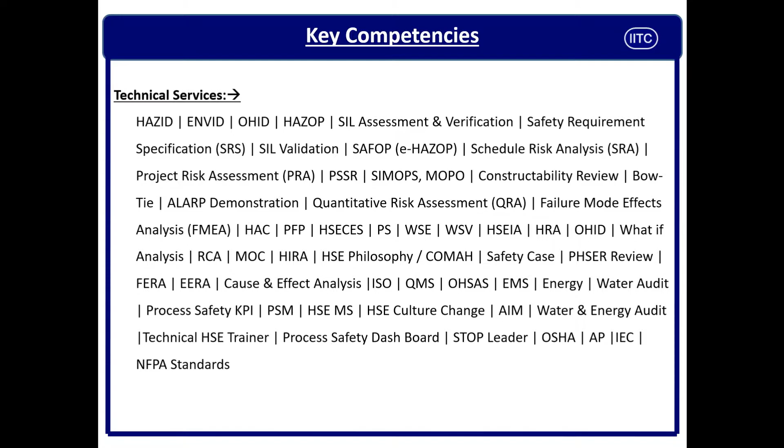Now we are going to see the training logistics. I will go a little faster. Probably I will speak slow, but my slides will be a little faster, so my intention is to give you the best in less time. You may wish to repeat this training if you have some difficulty understanding, because I am a bit fast.

Training logistics: when you are availing this training, you will come across various safety quizzes about this subject. So I would encourage you to attend these quizzes. These are subjective or objective questions. You can select appropriate answers. You are supposed to take many breaks during the module so that this will not become cumbersome or boring for you. I will leave it to you; I will not dictate the terms. This is all your own opinion. You may also stop this training if you wish to go for another assignment in between, and if you wish, you can come back and start the training from the same page.

As I mentioned in the beginning, this is going to be a basic training module for HAZOP, for beginners, for industrial people, or those who are already familiar with HAZOP. I'm very sure everyone will learn something in this small 20 to 30 minute video. You can take advanced training on HAZOP and HAZOP leadership after this session.

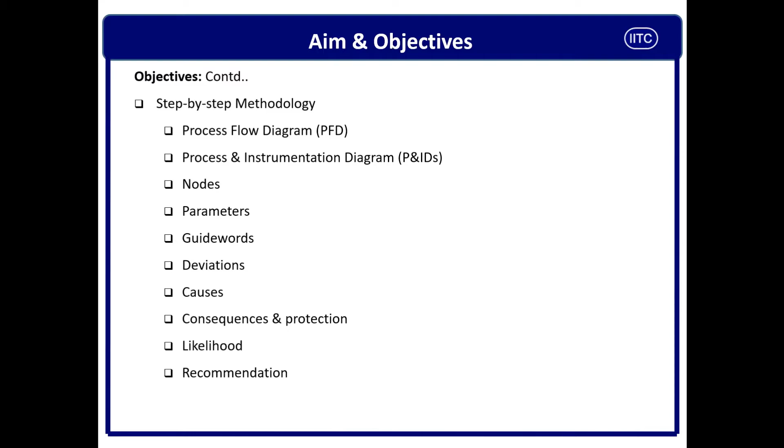and then severity. And after that, we will see the residual risk, and if the risk is beyond ALARP, which is in the unacceptable zone or intolerable zone, then we will try to find out the recommendations in the HAZOP study. We'll not find them out here. We'll see how recommendations are made and what the importance of recommendations is.

Guys, with this, I believe, we are going to see the overview of the HAZOP. I am very sure those who are attending this program know about HAZOP or might have heard this name. So we will see the overview of the HAZOP.

This training is intended to provide an overall understanding of the HAZOP process and its optimum application within the project. The training suggests a recommended practice for HAZOP leaders, secretaries, and team members for carrying out the HAZOP. It is very useful to project managers, engineers, operators, or any students in making decisions for process-related concerns, planning their construction, design or operation.

Now the question is, why HAZOP? There are many more tools in process safety like HAZOP, HAZID, bow tie, SIL, fault tree analysis, event tree analysis. Why this HAZOP? Why is HAZOP essential? As per my experience, I can tell you HAZOP is needed due to various reasons. Because safety is a prime goal of any industry.

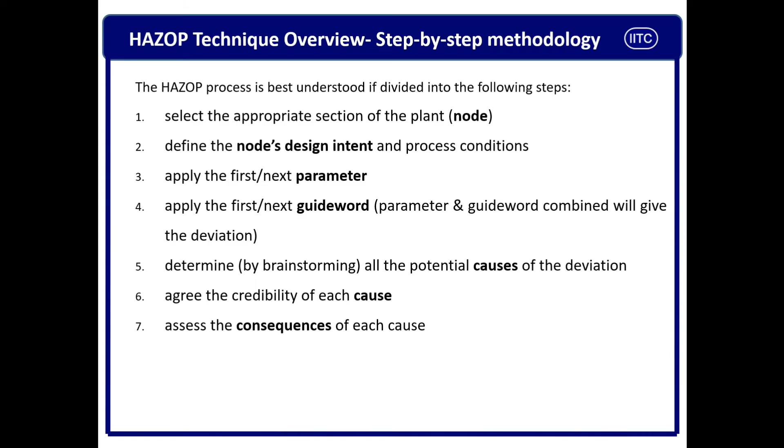And then we need to assess the existing safeguards or protection provided against the cause and its consequences. Then we need to do a risk assessment by identifying the likelihood and severity.

And then we say that there is a residual risk or risk ranking. If the risk is coming higher than the acceptable zone, in the intolerable zone, then we must identify the recommendation to bring this intolerable risk to tolerable risk, ALARP zone, or widely tolerable.

I have another session for quantitative risk assessment where, if you have time later on, you can go through the brief discussion about quantitative risk assessment. This will give you the definition of IR, IRPA, LSIR, PLL. So I will not discuss this in this session because I know you are short of time. So let us focus here. But if you are interested to take a look at QRA, please feel free to go through the quantitative risk assessment training after this session or at your convenience.

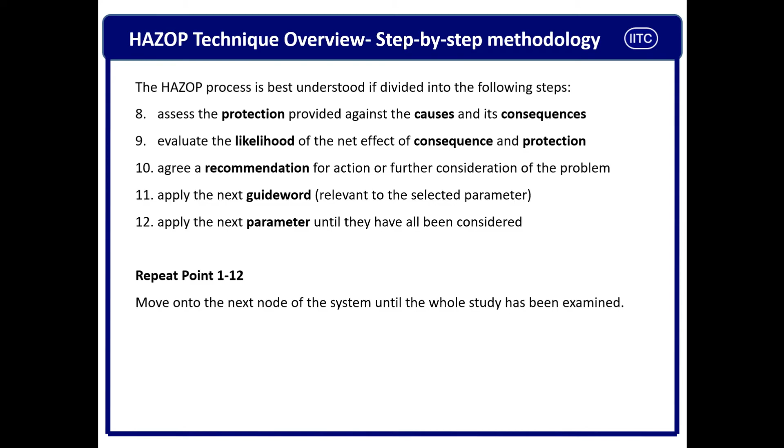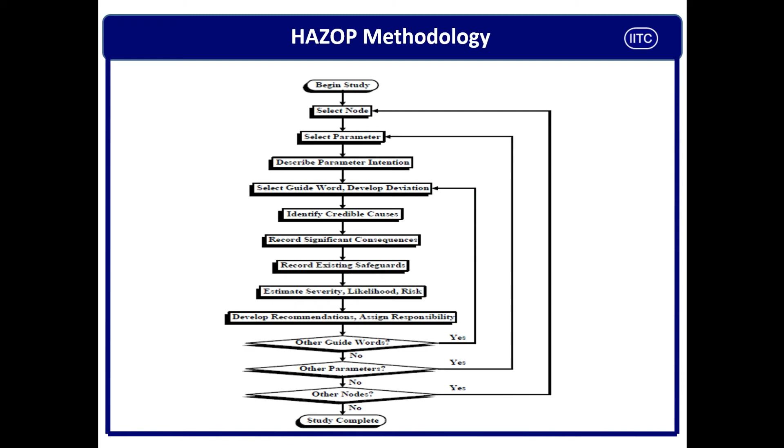So guys, I hope you are clear with this methodology. If you are not clear by any chance, or I spoke a little faster or went a little faster, then please feel free to go through the training again at your convenience.

What is a node? A node is nothing but the identification of a particular process segment. When you do node identification, you need to know equipment to equipment, process to process, process specification to process specification, and ESD to ESD. Keep these four elements in mind when you are identifying the nodes as a chairman, a scribe, a process engineer, or a process safety engineer, so that you do not overlook anything in the system.

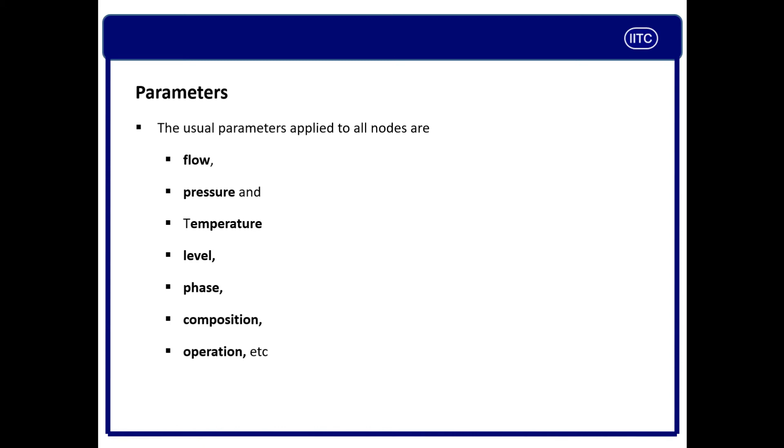Guys, as we discussed, there are different parameters. Here we see flow, pressure, temperature, level, phases, composition, operation. These parameters are combined with the guide words. The guide words are like no, more, less, reverse, as well as part of. Other than that, I have seen some companies with almost 20 parameters with these guide words. Depending on the company, you can increase your parameters. The guide words may be more or less the same, but we should see that it is not cumbersome.

So guys, here you are able to see the table. You can see a green legend, a red legend, and a lighter green legend. Where you see a red legend, that means the combination of parameters and guide words is not feasible, not possible. Don't forcefully use it, otherwise it is a waste of time and energy.

Where you see Y with a green legend, it must be discussed in the HAZOP session, because these are credible deviations, and these credible deviations can bring credible causes. Then you can see light yellow or light green, meaning P, possible. These combinations are possible, and with team concurrence, as required, you can go through them.

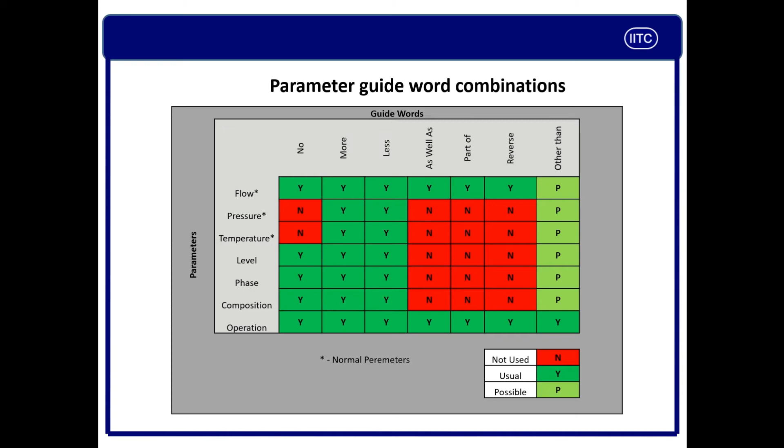What do you mean by deviation? As we said, guide words plus parameters bring deviation. So this is a simple definition of deviation: deviation from the operating envelope, deviation from the intended design, deviation from the intended purpose. This is what we need to remember at this point. We will not discuss it further, because for now it is enough. When we discuss the detailed HAZOP, we will take examples and try to clarify any doubts you have.

Causes. We have mentioned that guide words plus parameter bring deviation. Now we need to find out the causes for that deviation. No flow, why no flow? High flow, why high flow? High temperature, why high temperature? When you discuss in the team, you will understand the possible causes.

Let us understand one guide word plus parameter: no flow or less flow in the system. No flow may be because of upstream failure, downstream pump failure, valve closures, PCV, LCV, TCV malfunctioning closed, or blockage. There are any number of causes. When you understand your piping and instrumentation diagram and your process flow diagram, you will easily identify the possible causes.

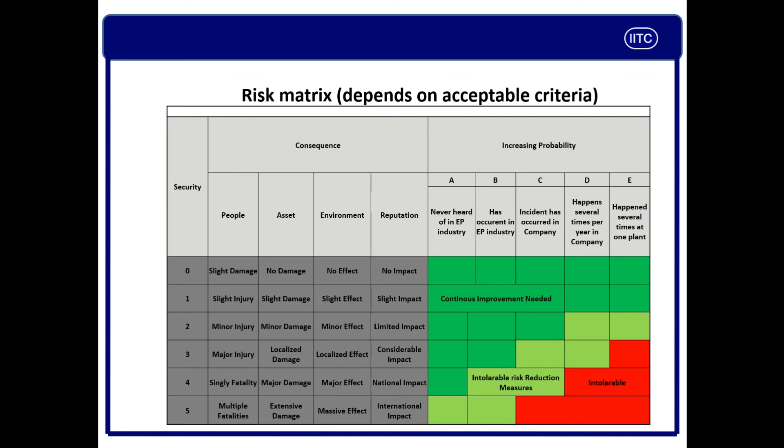See, here we need to give a close-ended recommendation. We should not give an open-ended recommendation. We should not say that there is a need to do a study and after the study you do it. This is open-ended. We should say install a PALL, install a PT, install a temperature transmitter, install a level transmitter on vessel number so and so.

So this is close-ended. The intent is we must give a SMART recommendation which is specific, measurable, achievable, reviewable, and time bound. Now we say SMARTER, now we say SMARTEST also. Sometime later I will explain what is SMART, what is SMARTER, what is SMARTEST.

Okay guys, now we are at the end of the session. Report writing is very essential. Recommendation closure is the most important thing in the HAZOP study. Report writing is the responsibility of the HAZOP chairman, to give everything very clearly, very specifically, with close-ended recommendations, and we must say how to close the recommendation, and when the recommendation is closed, it must be evidenced.